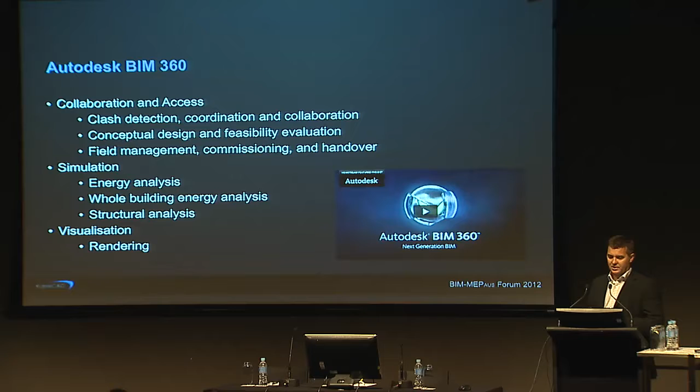There's cloud-based conceptual design and feasibility evaluation, field management, commissioning and handover tools they've just bought recently, and all the simulation and visualization tools running out in the cloud. So those things are starting to get a lot easier from the desktop.

You would have seen just recently that Autodesk acquired a company called Vela Systems, which is field management software for construction, aimed at a particular area. It's got mobile technologies, great project reporting for managing field performance, commissioning and handover workflows, online tools to track the status of systems and equipment, barcoding of systems and equipment for field access, and leveraging that coordinated BIM for commissioning and handover. So there's some really specific tool sets there in that world.

Something I did want to highlight today that is also relevant, although not aimed at the same industry, is that Autodesk have also released a cloud-based PLM solution. Now, we're talking about BIM here and all this information management.

A lot of the time it seems new, but the manufacturing industry has been working through managing their products from conception right through to service and disposal, probably since the early 80s, when product lifecycle management systems came out. What we're trying to do in the BIM world is kind of emulate what they've already done many times over. So it's worth, if you're not familiar with it, going to the Autodesk site on PLM 360 and having a look around at the kinds of things they do there.

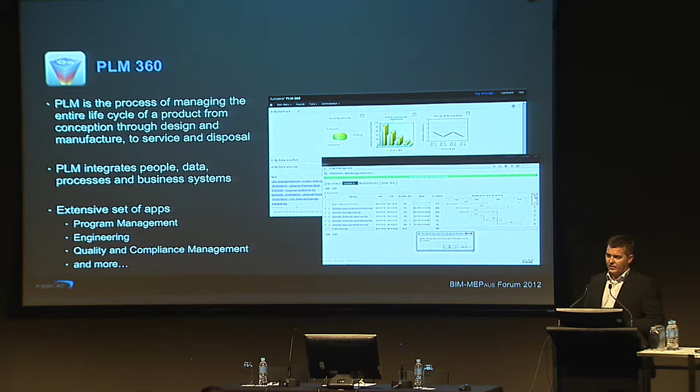Something I saw just recently, or relatively recently in its final form, got me fairly excited. The things that go in your mind all the time are, this whole exporting process is cumbersome.

What if your models could just be synced up and you don't actually have to do anything about keeping that all aligned? What if you didn't need the authoring tool on the FM or construction side? What if you could handle massive data sets in the one project? It had the document archiving linked to models within it.

You could actually track actual equipment in the field back to the model and the documents, and have all those other navigation and visualization tools built into the one tool set, so that anyone who needed to consume that data could get to it at any time, just through a simple internet connection.

So the technology that I saw that actually achieves that is a product called VEO. It's created by a company called M6 out of Portland, Oregon. And it's essentially a groundbreaking collaborative solution for operation, management, construction and design of buildings. It just goes that next step beyond. So all of the above.

We believed a completely new approach to data management, messaging, and collaboration would be required to support true building lifecycle management. After more than 4 years and tens of thousands of man-hours, the VEO platform is readying for launch.

One way to get a sense of its power is to watch this brief overview of the first wave of VEO apps.

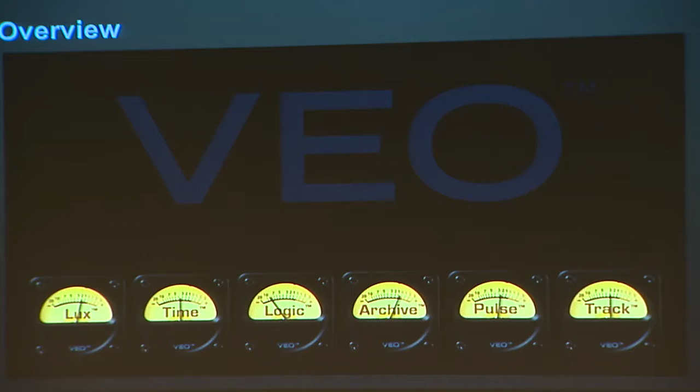Since virtually everything VEO does involves visualization, we'll start with our real-time 3D engine, Lux. Lux has cloud collaboration and support for huge data sets in its DNA. It will gracefully handle projects linking hundreds of Revit and AutoCAD files, and will soon support other design formats as well.

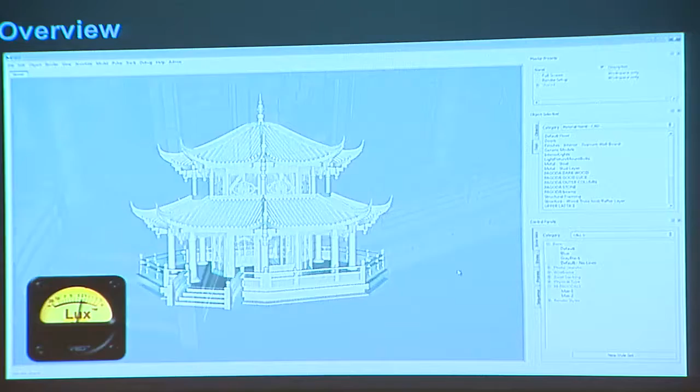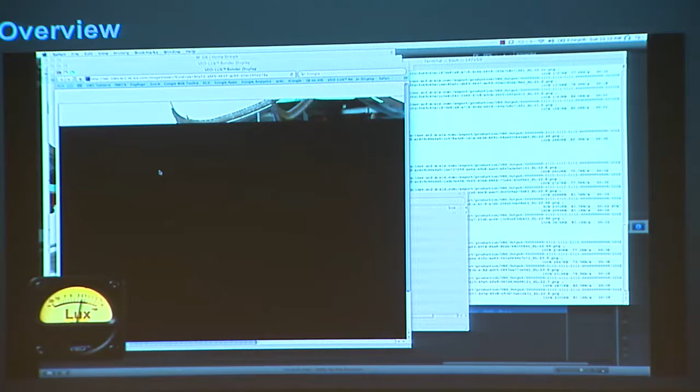In addition to the cross-platform real-time 3D engine, Lux makes it simple to render computationally expensive images in the cloud. Whether it's complete or still cooking, every image has a web address, so it can be viewed from any web browser or linked in an email.

For tasks that require more control, VEO offers a different kind of link. For users with the Mac or Windows version of VEO installed, a single click can load a particular project revision and set up every single setting needed to recreate an image in Lux or perform some other task in one of the other VEO apps.

We also wanted to be able to use these images to interact with VEO. So to further blur the distinction between real-time and offline graphics, Lux makes it possible to select objects in either, and the selection is maintained consistently across views.

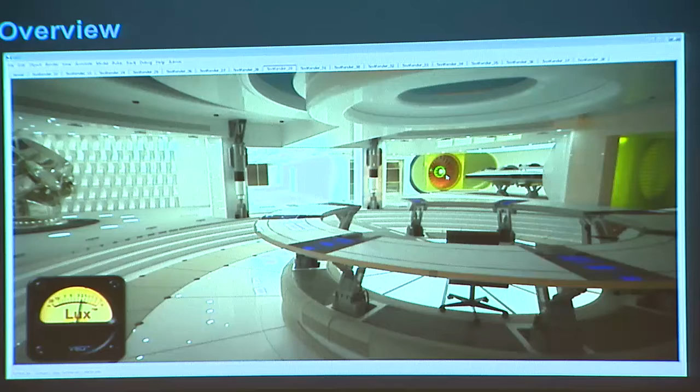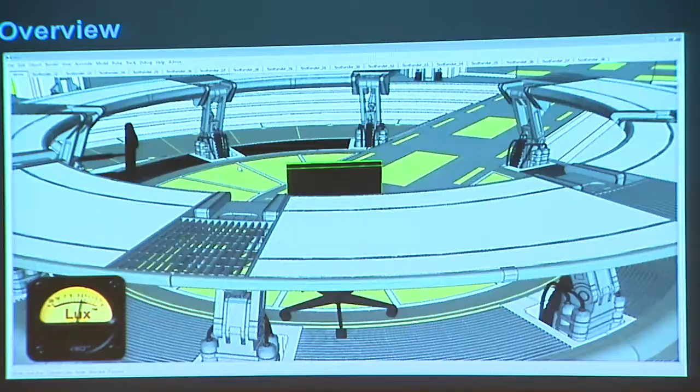Another feature of the Lux real-time engine that we wanted to be able to use with renders is the Frame Selected Objects command. With IntelliPixel, I can select an object in a rendered image and seamlessly zoom to it in the real-time engine. With Lux, rendered images are much more than just pretty pictures.

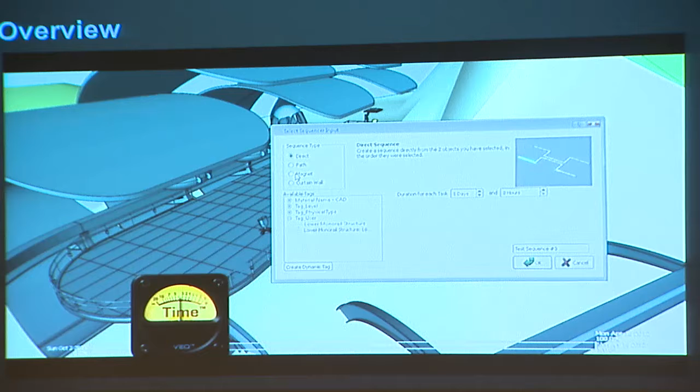Time is VEO's construction sequencing app. The sequences can be created manually by applying custom rules based on object type and context, or via our bidirectional link with Microsoft Project and Oracle Primavera P6.

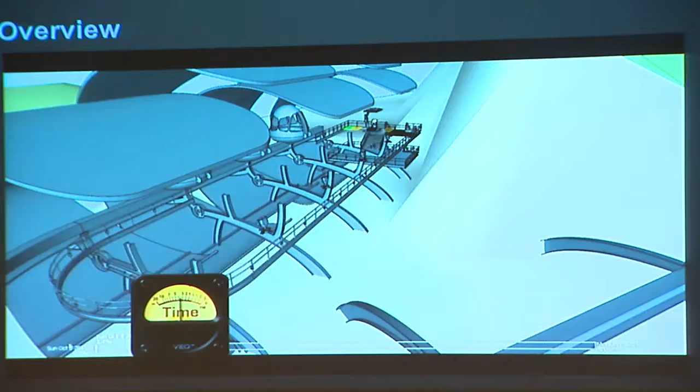Time provides simple drag-and-drop editing of nested sequences, task duration, and animation styles. Like all data in VEO, as soon as a new sequence is published, it automatically syncs across the team without requiring manual import-export steps.

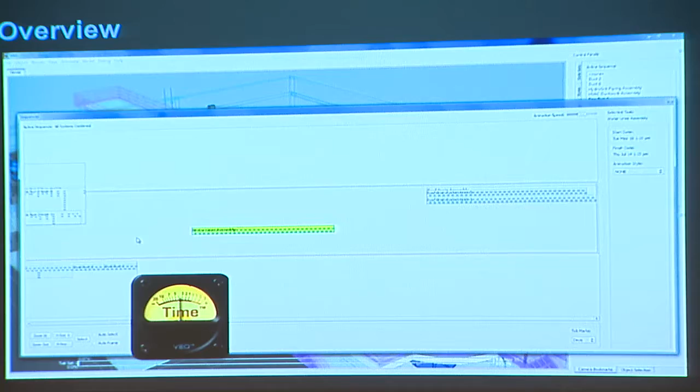Logic is VEO's app for design coordination and validation. Logic makes it simple to create custom rules and share them with the rest of your team, and it has great tools to isolate issues hidden in dense building models.

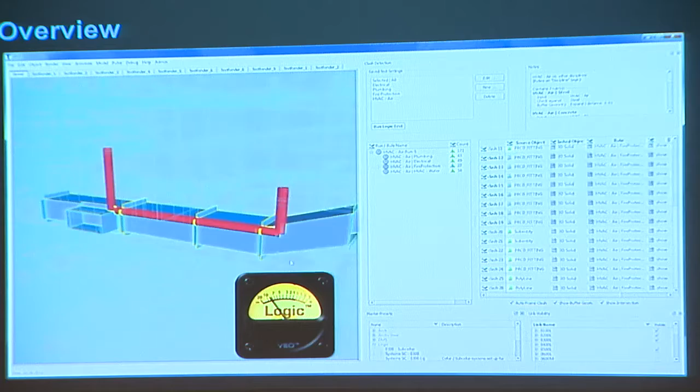While designing VEO, we've been giving as much thought to the anthropology as the technology, and that's especially true of Logic. Design coordination meetings often waste an enormous amount of time trying to determine exactly what has changed since the last meeting. With Logic, you always know who changed what, when, and why.

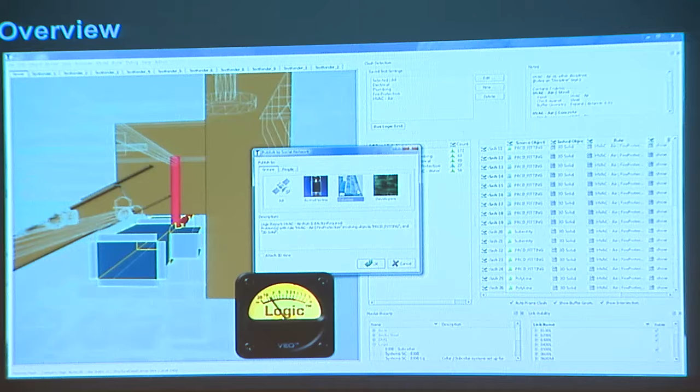And VEO's integration with enterprise social networks makes it simple to capture reports with embedded links and assign issues to groups or individuals according to your project's policies and best practices.

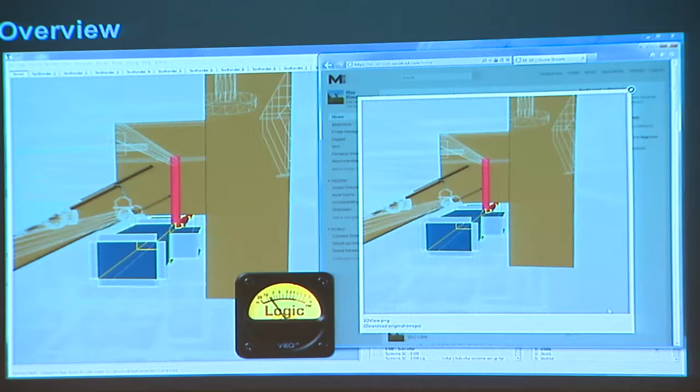Archive is the VEO app that provides a spatially linked digital document library. Documents are added to the library via drag and drop or bulk import. Like all the VEO apps, as soon as any team member shares information, it immediately begins syncing with the rest of the project team.

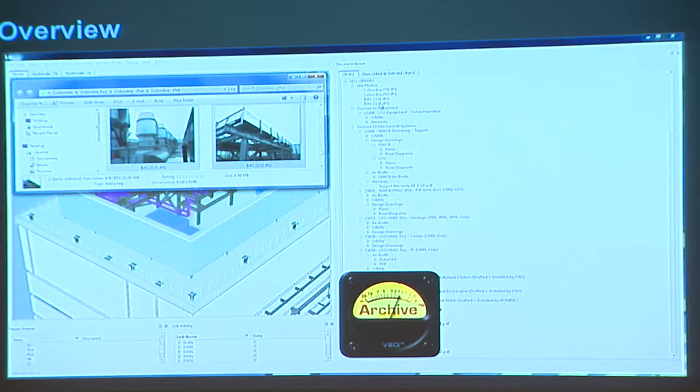Drag and drop is also used to associate documents with specific pieces of equipment or with categories of objects. We think a big part of the appeal of our integrated platform approach is that the different apps can combine in unexpected ways to solve problems.

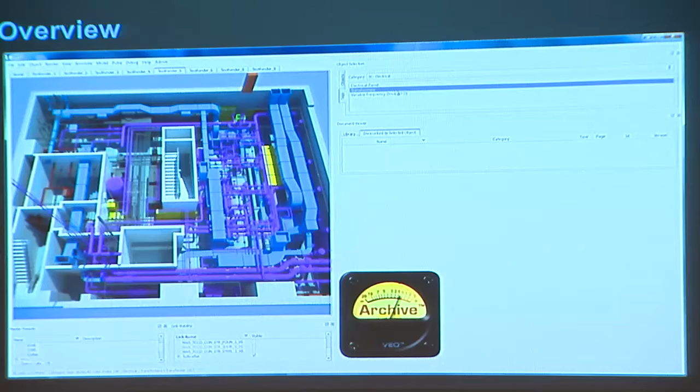Here's an example teaming Archive and Lux for use in operations and maintenance. The fine detail provided by Lux's cloud renders make it easier to navigate and understand the densely packed systems in the subcellar of this building.

As I click on equipment, I can see the relevant operating manuals, warranties, parts lists and repair history, and many other document types.

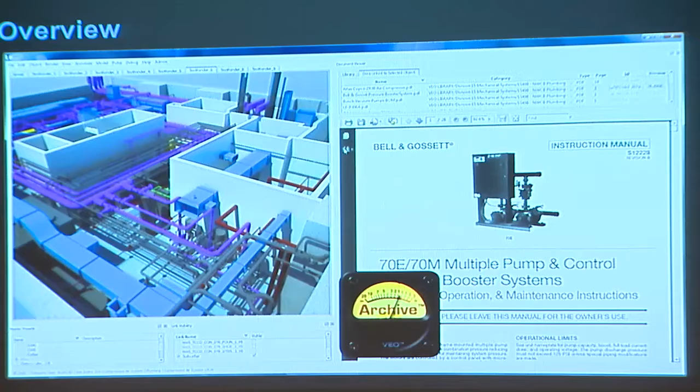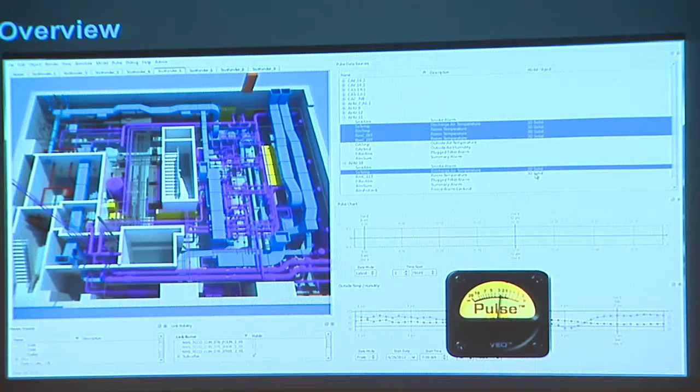Pulse is the Veo app that integrates with sensors and building management systems. Pulse allows real-time and historical sensor data to be visualized and spatially linked to the final as-built model. With a single click, the workspace can be configured with the appropriate data layers, charts, and camera position needed to understand a particular aspect of the building's performance.

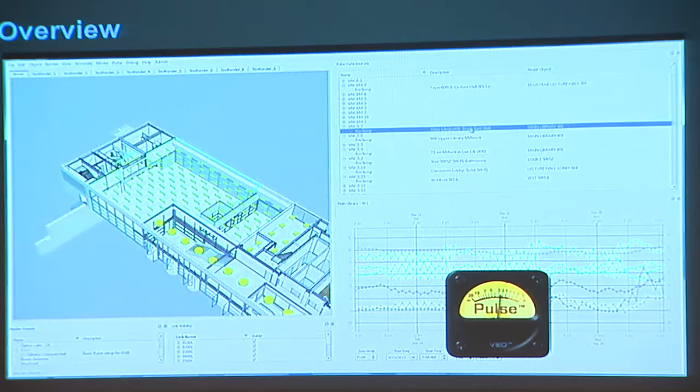In this example, clicking on a room volume highlights temperature values for that room. Clicking on a sensor data source zooms the camera to the associated model object.

Pulse will also display alarms reported by BACnet sensors. For example, if this standby exhaust fan signals that a motor self-test has failed, facilities management personnel can easily find related documents in Veo Archive.

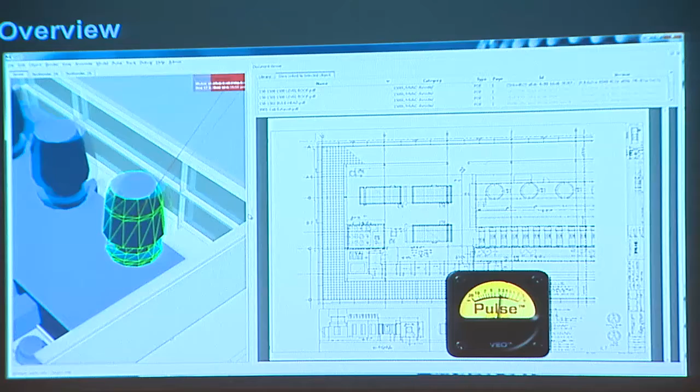In the office or in the field with a tablet, it will be simple to refer to startup instructions, maintenance procedures, repair history, warranty documents, and so on.

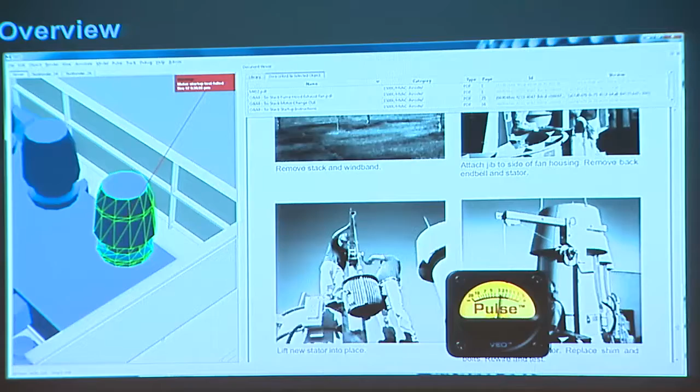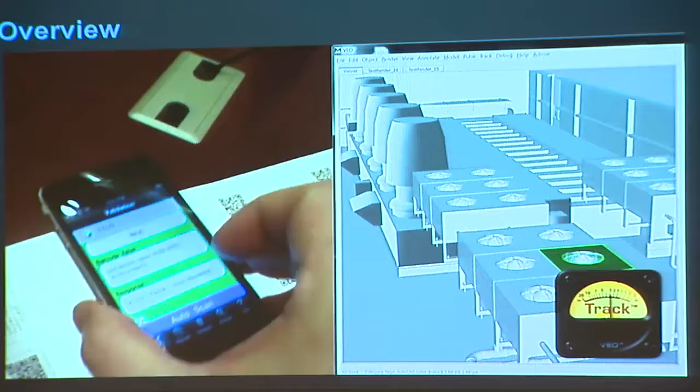Here's a preview of the latest Veo app. It's called Track, and it's a simple but powerful tool to track the location and status of materials and equipment during and after construction. With each scan, a message is sent to the cloud database and is then published in real time to any users logged in with appropriate permissions.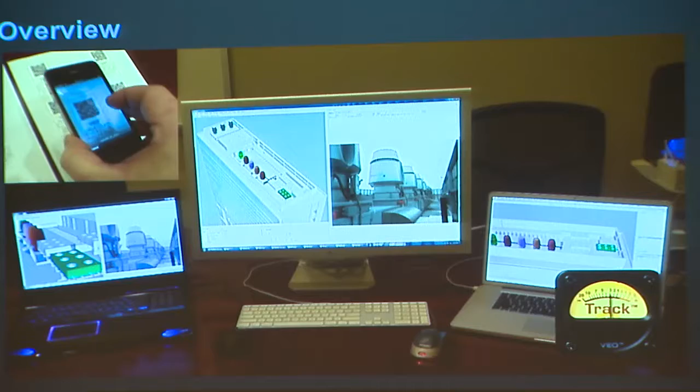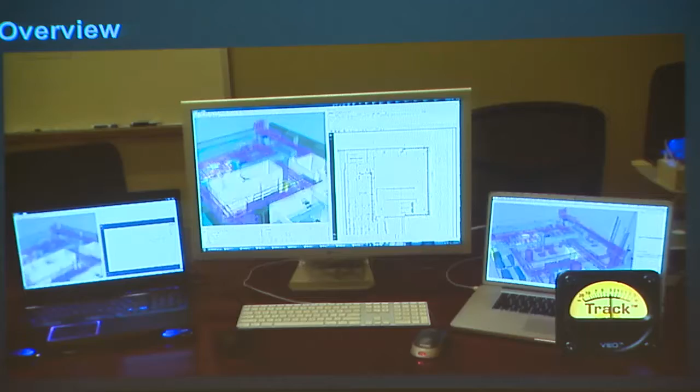After construction is complete, Veo Track is an amazing operations and maintenance tool. Simply scan a barcode on a piece of equipment, and Veo will display all the relevant documents stored in Veo Archive. When paired with our upcoming iPad app, this will be an incredibly useful way to access operating manuals, parts lists, warranties, maintenance procedures, service histories, inspection photos, and virtually any other kind of digital document. Veo provides the right information when and where you need it most.

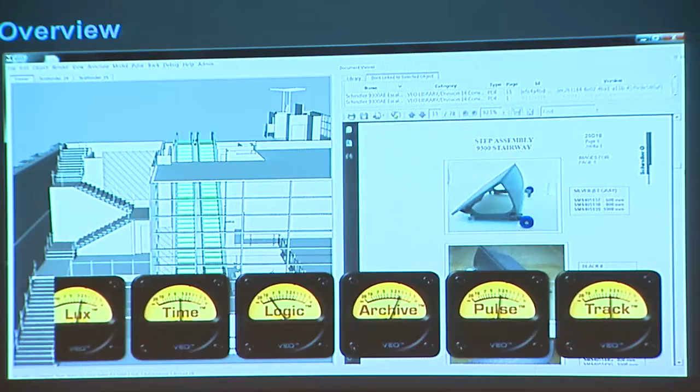What do you think? Pretty average, hey?

Okay, I'll show you a little bit more detail on just a couple of the modules rather than sit here and watch videos all afternoon. And when we get to the end, I'll point you to a link where you can watch them yourself, in one way or another.

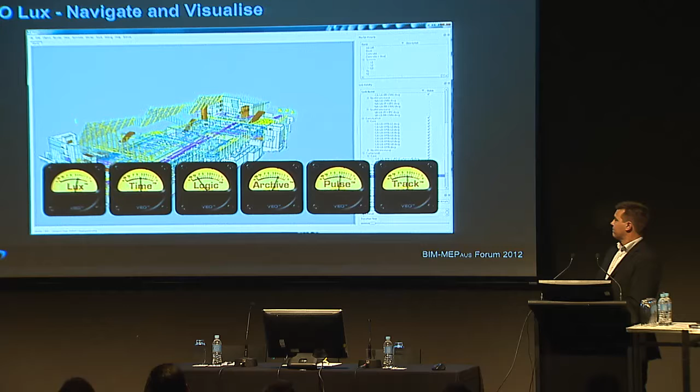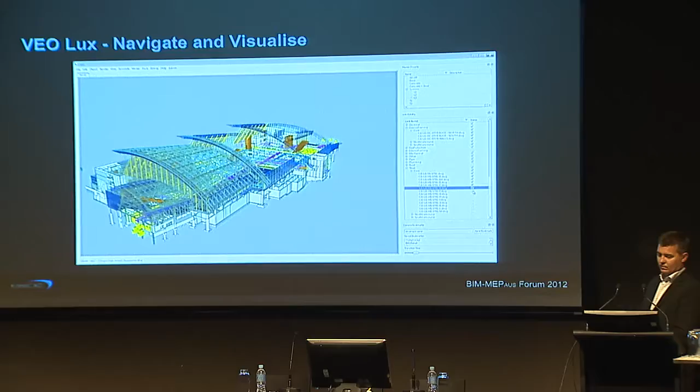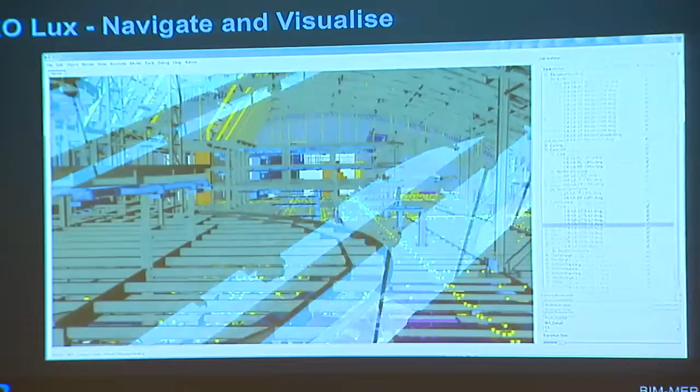So we spent an enormous amount of time and effort to create Lux, our real-time and offline visualization solution. Lux was designed with cloud collaboration in its DNA, and it supports truly huge data sets, like this model of a new international air terminal currently in construction. It consists of hundreds of Revit and AutoCAD models linked into an integrated environment for decision-making and visual communication.

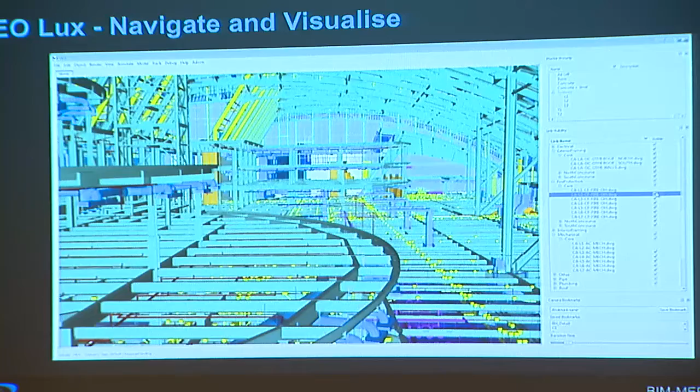Lux has great tools to focus on the data you care about for a given task, but sometimes there's no substitute for interacting with a ton of data simultaneously. The frame rate is getting pretty chunky here, but still impressive considering this is well over 10 gigabytes of data, and with each new version, Veo is improving performance for truly huge projects like this one.

In addition to the real-time 3D engine running on the graphics card of your Mac or Windows machine, Lux offers cloud rendering for computationally expensive images that take minutes or hours to complete.

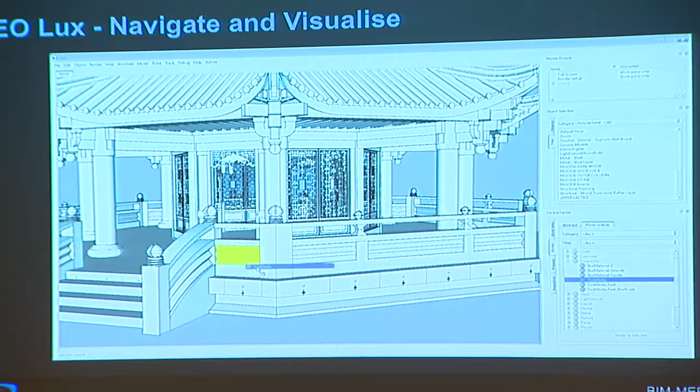To specify how the render should look, simply drag visual styles onto the objects in the model. Lux will show a preview of how that visual style will look once it's rendered. If you drag a style to a tag representing a class of objects instead of one specific object, you create style sets.

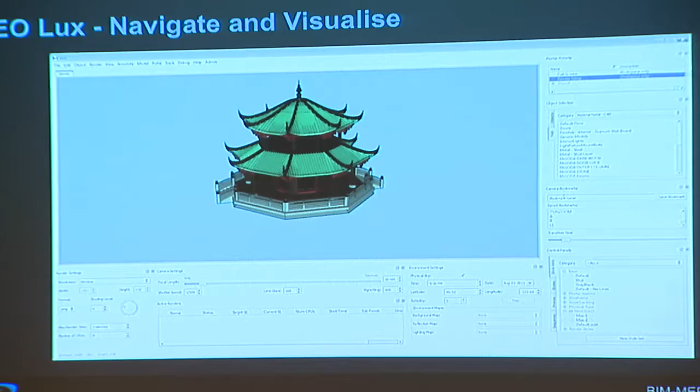These style sets can be reused across revisions as the project evolves and can easily be shared for use on different projects. It's just as simple to specify other render attributes like camera position, image quality, maximum render time, exposure settings, as well as time of day and latitude-longitude for the simulated sky.

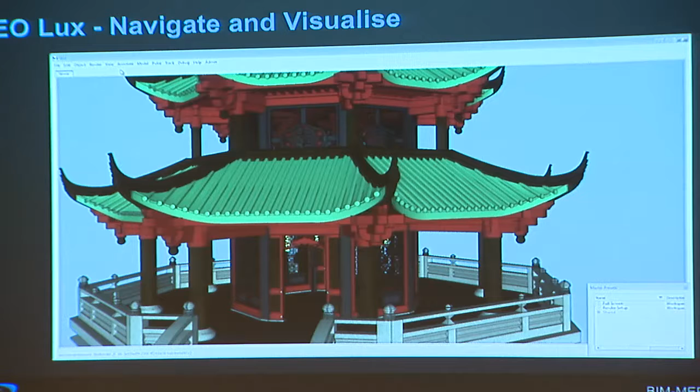When you send your render request, one or more cloud servers go to work on your image, and you can have as many renders as you like processing in parallel. Using 8 server CPUs, this high-resolution image took several hours to reach this level of quality. If I needed this image faster, I could have given this render job more CPUs.

Whether it's complete or still cooking, every image has a web address, so it can be viewed from any web browser or linked in an email.

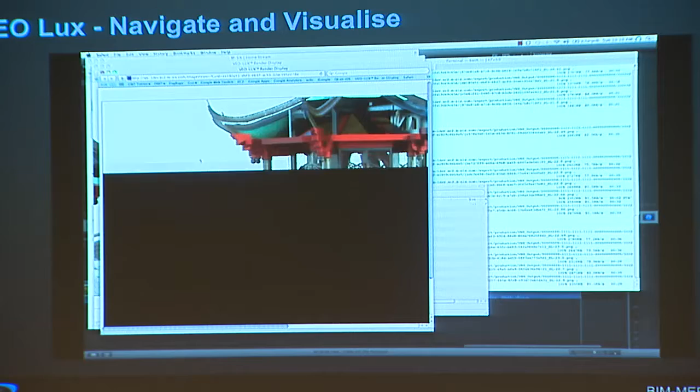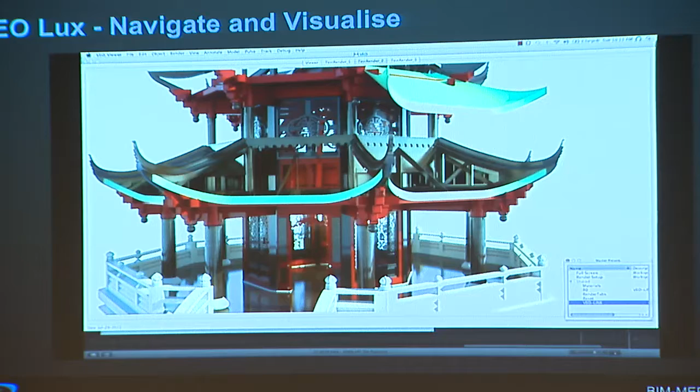For tasks that require more control, Veo offers a different kind of link. For users with the Mac or Windows version of Veo installed, a single click can load a particular project revision and set up every single setting needed to recreate an image in Lux or perform some other task in one of the other Veo apps.

These computationally expensive images are great at communicating subtle details, and because all the work was performed in the cloud, I was free to focus on other tasks while they rendered. However, switching from image to image is momentarily distracting while my brain takes a few milliseconds to get spatially oriented.

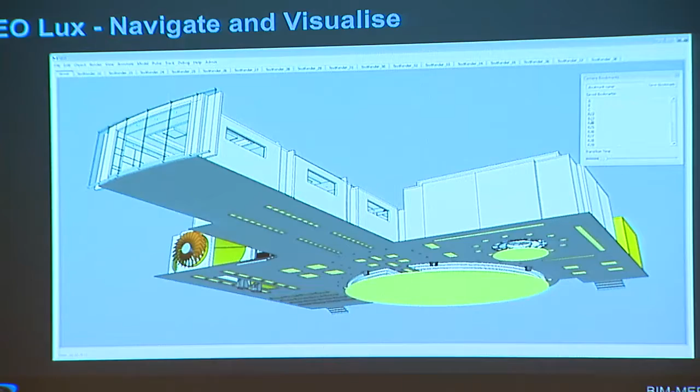Our real-time 3D engine avoids this by smoothly interpolating the frames between camera bookmarks, so we thought it would be cool to do the same thing with cloud renders. We worked on this quite a bit and were really pleased with the result, which we call IntelliPixel.

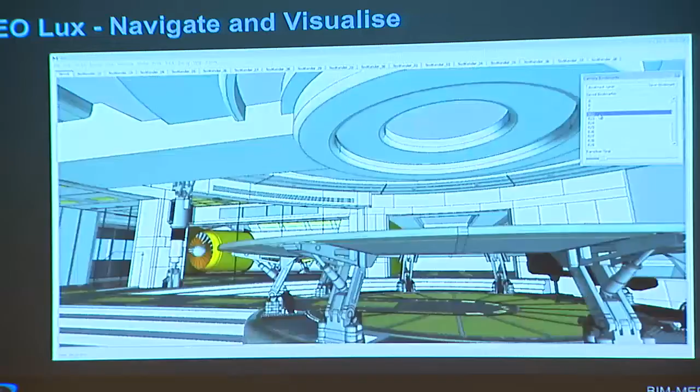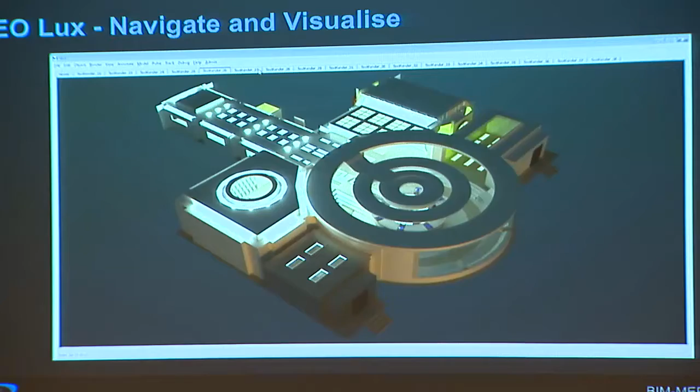With this feature enabled, when I click a rendered image tab, instead of just switching to the image, Lux sets up the real-time 3D engine to match the starting image and smoothly interpolates the camera motion to the destination image.

We also wanted to be able to use these images to interact with Veo. So to further blur the distinction between real-time and offline graphics, Lux makes it possible to select objects in either, and the selection is maintained consistently across views.

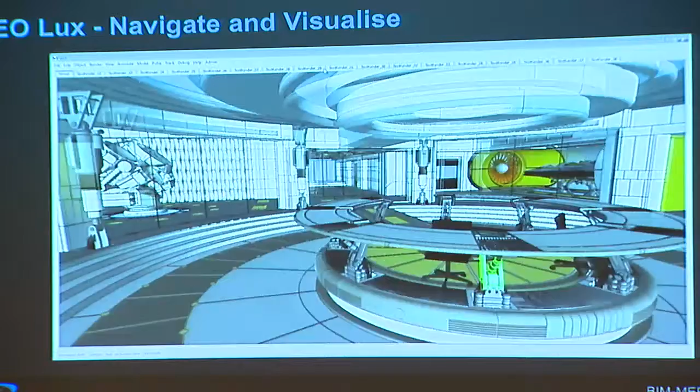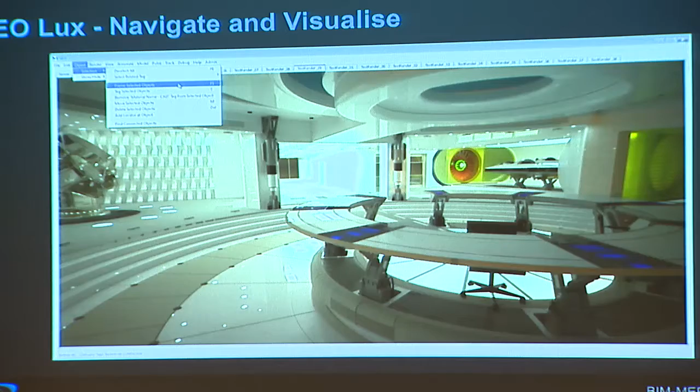The same mouse gestures that pan, zoom, and rotate will seamlessly switch to the real-time 3D engine and work as expected. Another feature of the Lux real-time engine that we wanted to be able to use with renders is the Frame Selected Objects command. With IntelliPixel, I can select an object in a rendered image and seamlessly zoom to it in the real-time engine.

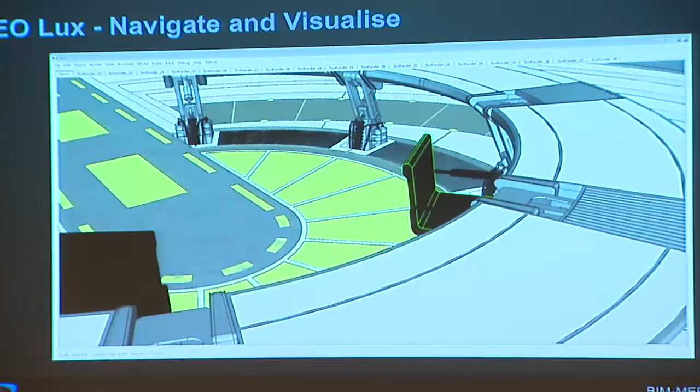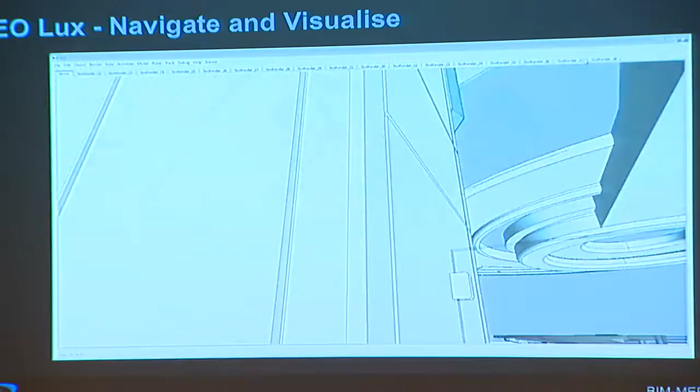With Lux, rendered images are much more than pretty pictures. In addition to being a persuasive way to communicate ideas, these images can be used for navigation and other kinds of interaction. When you explore the rest of the Veo platform, you'll see that most of the other apps take advantage of this powerful feature.

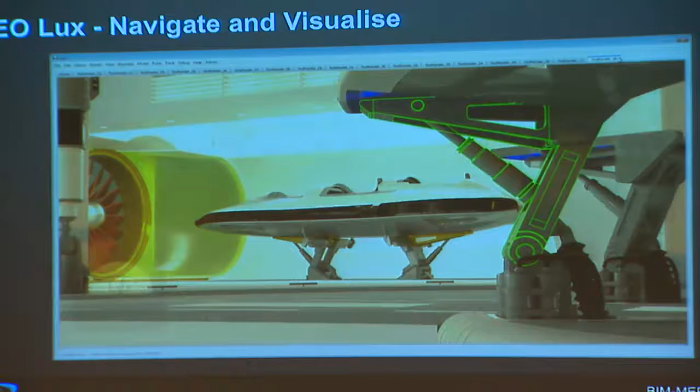So you thought there were a lot of rendered images now that you guys have had Revit. Wait till you get this. Lots of rendered ductwork, eh? I can see Brett chomping at the bit.

This next module is just a little bit more detailed look at the asset, the Veo Track, which is the barcode connection.

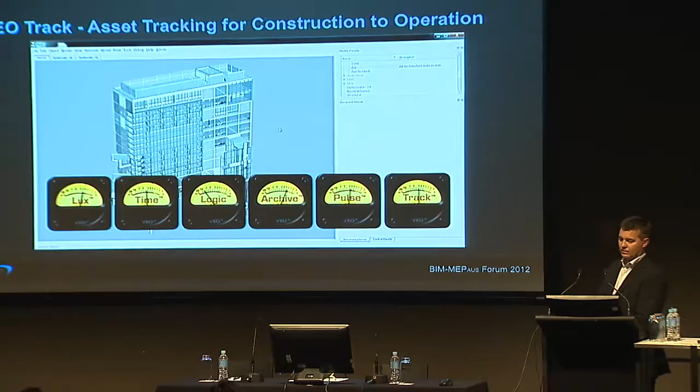Here's a preview of the latest Veo app. It's called Track, and it's a simple but powerful tool to track the location and status of materials and equipment during and after construction. Like the rest of the Veo platform, Track is designed to provide access to information when and where it's needed most.

Veo Track can generate barcodes for any selected object and can associate objects with barcodes from external systems as well.

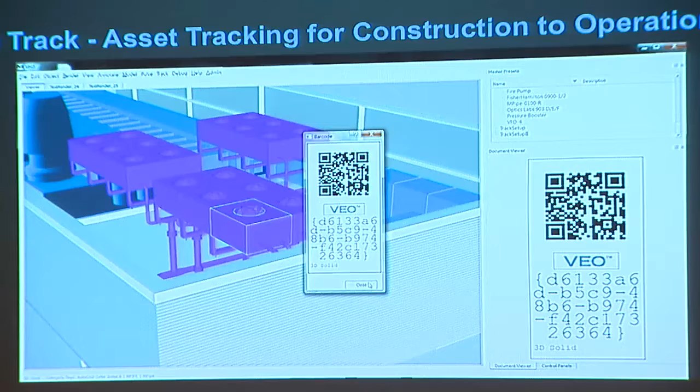In this example, we have three Veo clients set up to subscribe to messages from Veo Track and display equipment status in real time as it's updated in the field from mobile devices such as iPhone, iPad, or Droid.

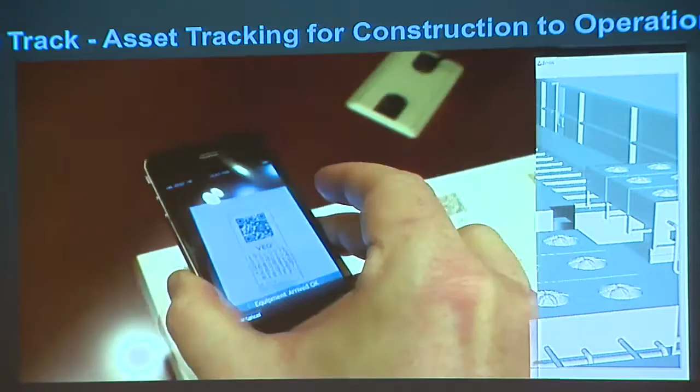In this first example, we're illustrating how someone in the field can scan materials and equipment to indicate a change in status, such as arrival at the job site or successful installation.

With each scan, a message is sent to the cloud database and is then published in real time to any users logged in with appropriate permissions.

It's simple to provide additional information in the field and set up a color-coded view to emphasize conditions that need attention, such as equipment arriving damaged or systems that are overdue for inspection.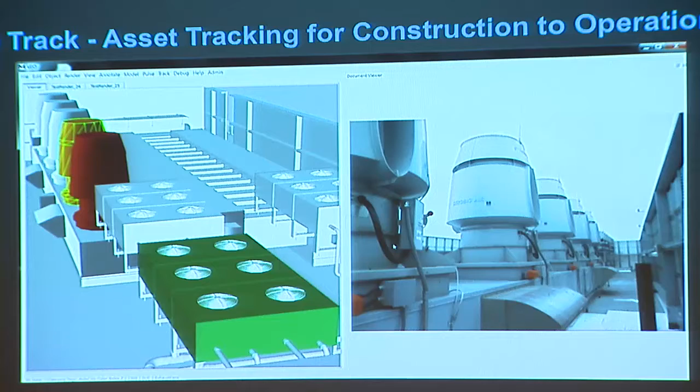Just like the rest of the Veo apps, Veo Track automatically shares new information with the appropriate users without requiring email attachments, FTP sites, or any of the other primitive data sharing technologies that make it difficult to be sure you have complete and up-to-date information.

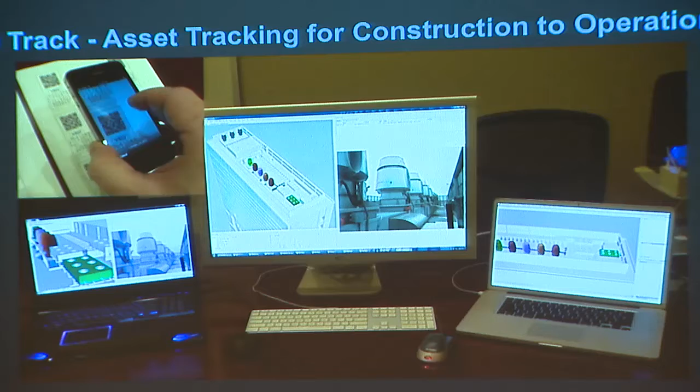It's great to have access to all the design and fabrication models for a project, but that represents an enormous amount of data. Veo makes it easy to create a kind of bookmark that sets up everything needed to perform a particular task. Scan a barcode and Veo can automatically position the camera and enable the appropriate data layers, from low-level-of-detail room volumes to intricately detailed as-built models.

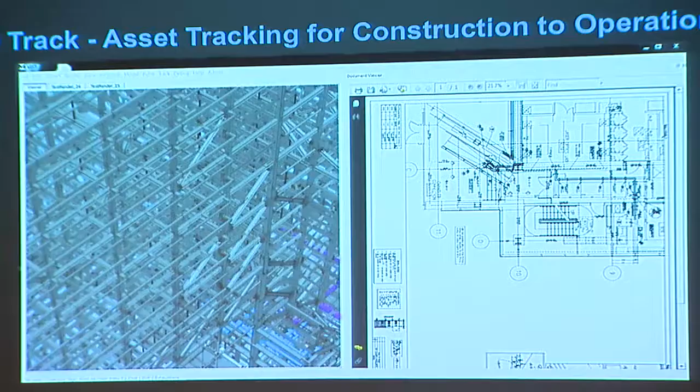If they weren't already loaded, Veo will bring in any needed model items or documents.

After construction is complete, Veo Track is an amazing operations and maintenance tool.

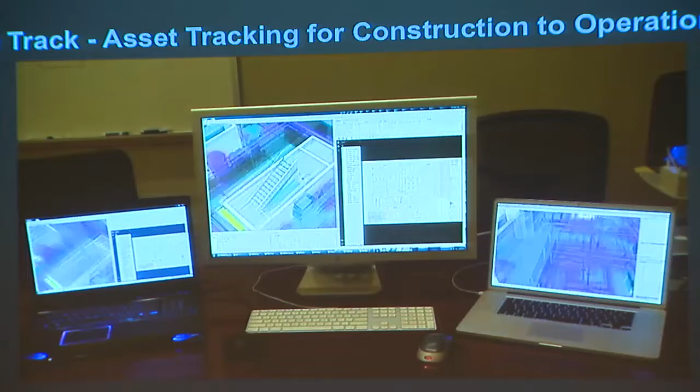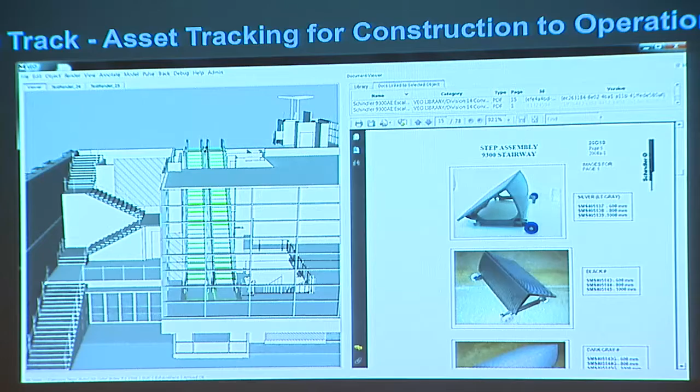Simply scan a barcode on a piece of equipment, and Veo will display all the relevant documents stored in Veo Archive. When paired with our upcoming iPad app, this will be an incredibly useful way to access operating manuals, parts lists, warranties, maintenance procedures, service histories, inspection photos, and virtually any other kind of digital document.

Veo provides the right information when and where you need it most.

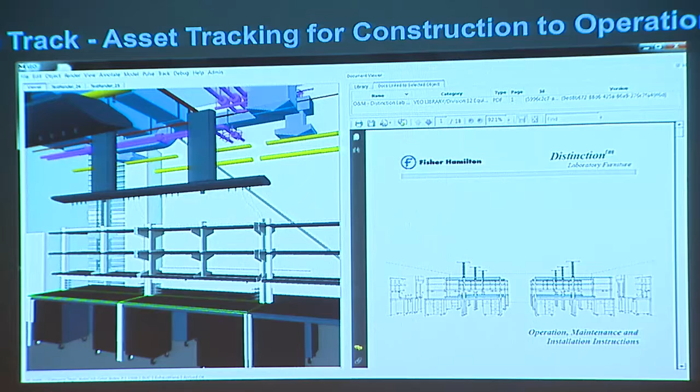So this last one, I won't take you through much more. This one I thought was particularly relevant, being connected into real-time sensor data.

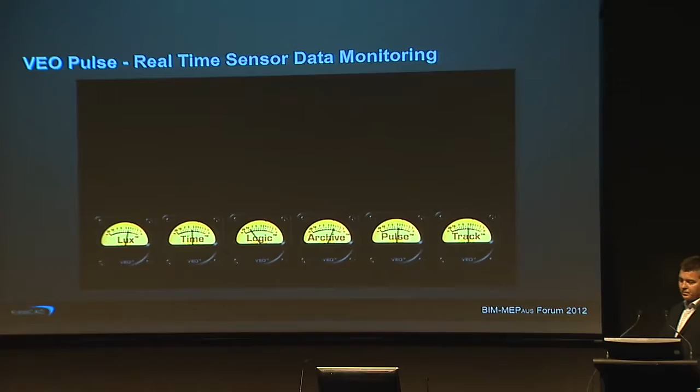Pulse is the Veo app that integrates with sensors and building management systems. Pulse allows real-time and historical sensor data to be visualized and spatially linked to the final as-built model.

Using a building automation standard called BACnet, Pulse can scan the devices installed in the building and collect metadata describing their capabilities and data types.

Veo's plugin for Excel is used for initial setup, such as specifying how frequently readings should be sent to the central database. In this particular building, there are nearly 15,000 available data sources. The sorting and filtering tools in Excel make it easier to find data sources and assign them to polling groups.

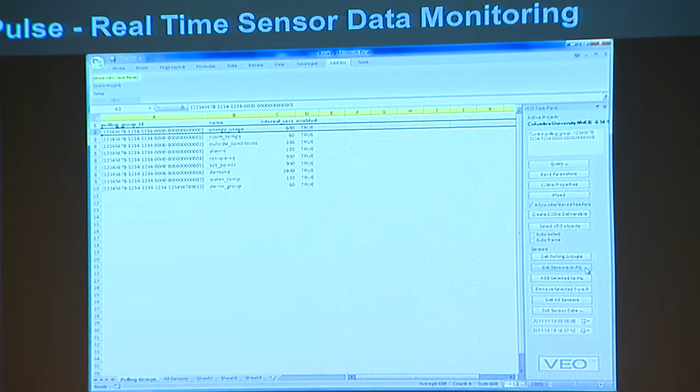Once configured, a small, ruggedized appliance located on site will read temperature, energy usage, occupancy, and many other sensor types, and report values in real time to the Pulse server.

The Pulse app makes it simple to use saved charts, or create new ones by dragging data sources onto empty charts. It's easy to specify time ranges, and the level of detail adjusts automatically. Clicking on objects in the model highlights associated sensor data.

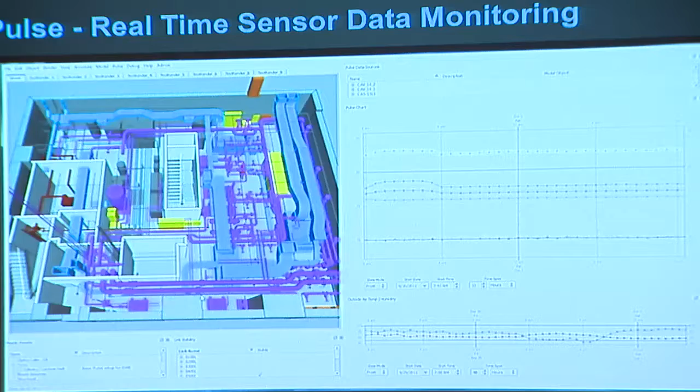Presets can set up Pulse to monitor a particular system and zone. With a single click, the workspace can be configured with the appropriate data layers, charts, and camera position needed to understand a particular aspect of the building's performance.

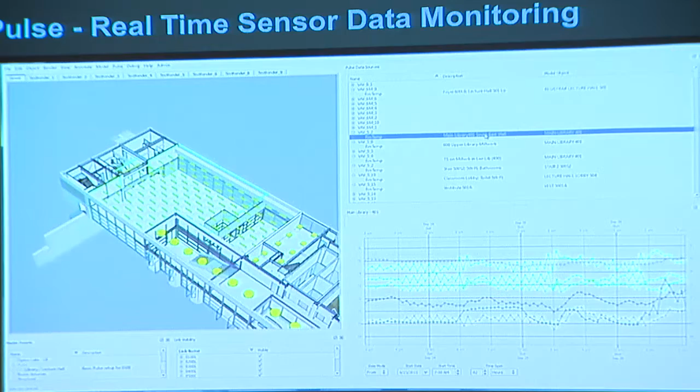In this example, clicking on a room volume highlights temperature values for that room. Clicking on a sensor data source zooms the camera to the associated model object.

As Pulse evolves, we will make it easier and easier to compare expected versus actual performance, to discover anomalies that need attention, and to suggest adjustments to optimize system performance.

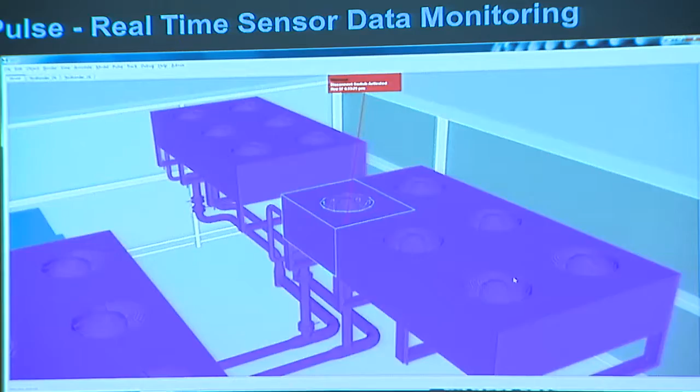In addition to monitoring sensor data, Pulse can report exceptional conditions. Alarms can be configured to highlight objects in the model when a piece of equipment signals an error state, or a sensor value goes out of tolerance.

For example, if this standby exhaust fan signals that a motor self-test has failed, facilities management personnel can easily find related documents in Veo Archive.

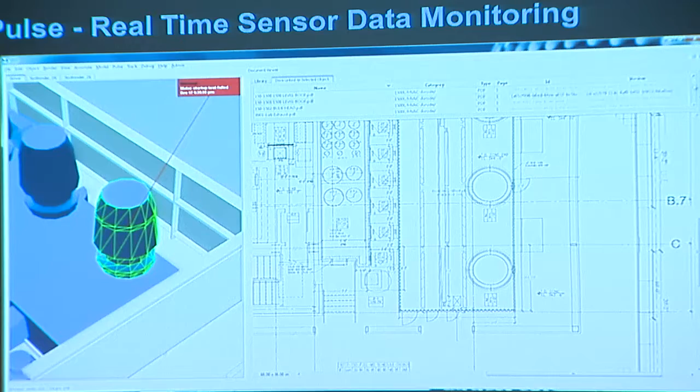In the office or in the field with a tablet, it will be simple to refer to startup instructions, maintenance procedures, repair history, warranty documents, and so on.

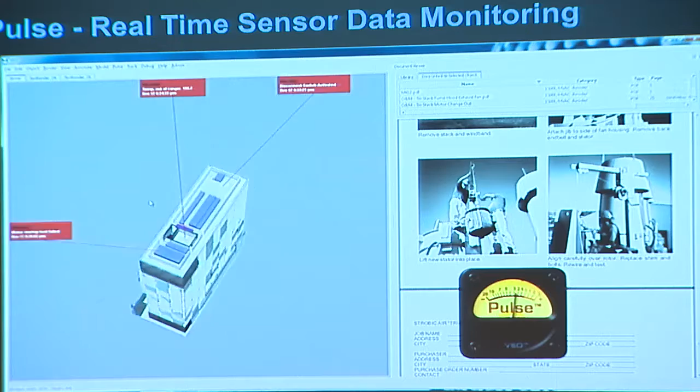Pulse provides a powerful but simple link between building sensors and the final as-built model. The tight integration with Archive and the rest of the Veo platform illustrates how effective it is to have the information you need when and where you need it most.